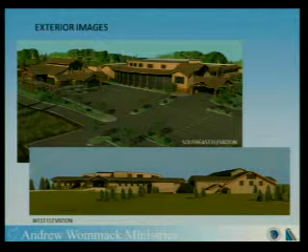This said, I will go ahead and turn it over to Kyle, and he can visit with you about the site.

Good evening, Kyle Campbell with Classic Consulting Engineers and Surveyors. I'm here to walk you through some of the site elements and some of the design elements that took place in order to get this final development plan in front of the Planning Commission this evening.

When we were first approached about this project, we were brought in early January. We were very excited about the opportunity to join this particular team and work on this project in Woodland Park. We very quickly got up to speed with the site and with a lot of the prior comments from city staff on how to move forward with trying to get this project completed.

And so what I'm going to do, if I can... okay, how do I get to the next slide? It's not responding to it. Right there. Cool. Thanks.

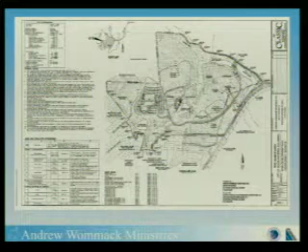As we get into the grading exhibits, it'll become evident why we chose this layout. Initially there was a concept of crossing the existing jurisdictional pond facility here, but because of the state's classification and the complications associated with that, a much better and more conducive choice from a grading standpoint was to relocate the roadway up along through here, honoring all the previously established setbacks along the southerly subdivision.

The existing pavilion is located here in relationship to the Bible College facility, with additional future housing directly to the north of that.

Moving into some of the detail sheets, the only thing I want to point out here is that a great amount of time and effort was spent working with the fire department to understand their needs for access to the site.

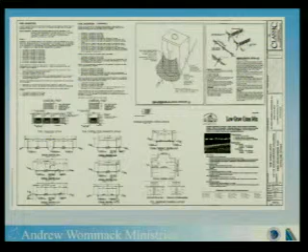On this sheet you'll see a variety of proposed private street sections, from the main entrance road to the guardhouse all the way up to the college building itself. We worked with the chief and with Vern Chaplin to get an understanding and acceptance of our proposed street sections, trying to balance the city's criteria with the fire department's criteria for access and width.

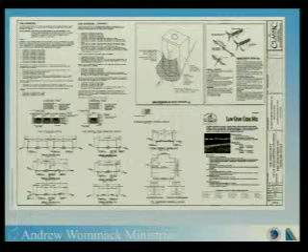There are more erosion control details here, but I won't spend any time on that.

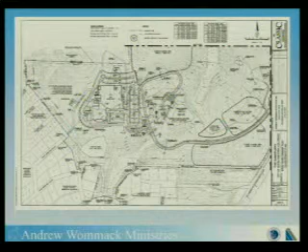Moving into the main overall plan, we get into more detail on the parking configuration around the Bible College itself. As Brett explained, there's a Phase 1 portion located at this corner, and a Phase 2 located up in this area, which has been notated on our plans. The roadway alignment, once again, crosses this tributary drainage corridor right here.

One thing I wanted to point out is the traffic circulation related to the site, as far as bringing traffic in, how it works in relationship to the drop-off area, and then exiting traffic.

This is a two-lane paved roadway coming into the site with a 12-foot wide gravel shoulder. That shoulder is primarily going to be used as a pedestrian corridor to allow hiking and pedestrian activity along through the various ultimate uses.

But during larger events, it will act as an overflow lane. That was something we worked with the fire department on as well, to get their understanding of what ingress and egress would look like during normal events and larger events, and how we could always maintain circulation in and out of the property.

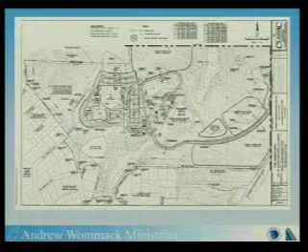As we approach the college itself, the road starts to split. While this is still a two-lane roadway, an access road splits off to provide access to the residential area to the north, and access for handicap parking for the pavilion and amphitheater in this area. Then we split off into the parking and the drop-off area for the main portion of the building.

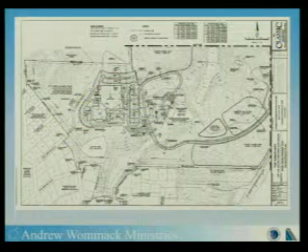We have a one-way exit lane exiting the property in this location. That's not only to assist with larger events, but even during normal events, as far as separating the traffic, allowing a free flow of traffic both in and out of the project for a very nice circulation pattern through the site.

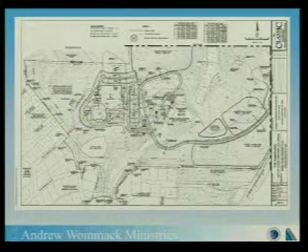As we get into this more easterly portion of the property, we've got the gatehouse. What I wanted to point out on this exhibit, and what's also reflected on the preliminary plat, is that the current property runs down portions of it through the center of Trout Creek Road, and portions of it, all of Trout Creek Road, is inside the property.

So this plan and the preliminary plat reflect the right-of-way dedication that will take place with the final plat, to basically get all of that outside of the property and get that right-of-way dedication taken care of, so the roadway is completely addressed.

We're also showing the 8-foot wide public trail contained inside that right-of-way dedication along our property. That was one of the requests of Woodland Park, and we were able to accommodate that with our last round of revisions.

This is the overall grading plan. One of our goals, and a lot of my company's experience is in hillside projects, is looking at roadway profiles and geometry to try to minimize the slopes and the impacts of roadways on the grading. One of our initial challenges was trying to maintain 2 to 4% slope grades, primarily through the entrance and the guardhouse.

As we got into key intersections, we made sure we were meeting city criteria related to public street standards. Even though these are private streets, we thought it was very important to approach it that way. We also tried to keep our street grades within a maximum of about 6 to 8%, and we were able to do that.

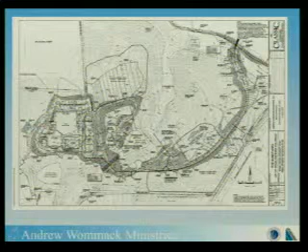I'll point out on this plan the location where we're showing our detention facility — I'll talk about that more as we get into the drainage maps. This is also the embankment crossing, where we cross the tributary drainage corridor down into the middle pond in that location.

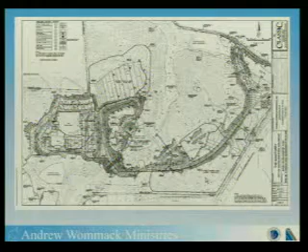Erosion control plan — I won't go into a lot of detail, or any detail, on that.

We then start to get into the utility plans. There's obviously a lot of information contained on these plans. I'm going to defer the conversation about the overall water system to a later slide in this presentation that will point out the benefits and what we've been able to do from a water system standpoint.

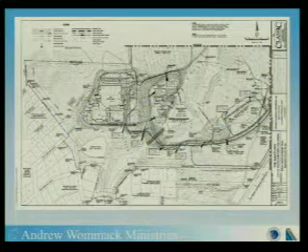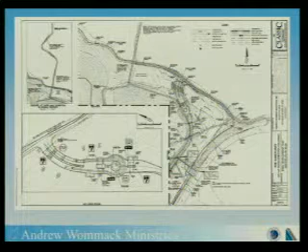I'll point out on this second utility plan that we have the main entrance and the guardhouse facility here. We were able to go back and modify that entrance, working with the fire chief and with Vern, to get the widths, dimensions, turnaround radiuses, and slopes through this main entrance corridor right, to make it an easier and safer travel path.

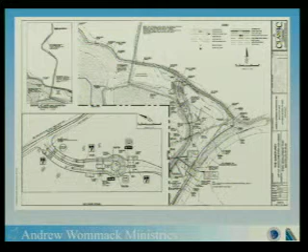Just a brief explanation of the security measures during normal operations. If you're a visitor or supposed to be on campus, you enter the site here, stop at the guardhouse, and the actual gate is located further back. So if you turn in here and think you're going somewhere else or aren't sure where you're at, you have access to this turnaround to turn around and exit the site before entering beyond the gated area.

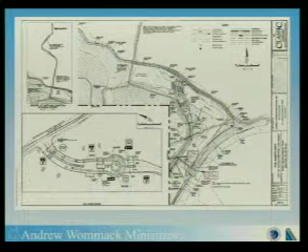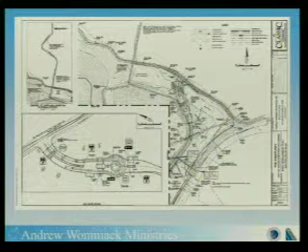We were able to design this not only for fire trucks but also for semis, for deliveries and things like that. A lot of people wind up in places they're not supposed to be at, so we've provided appropriate turning movements to make sure that's not a problem for visitors to the project.

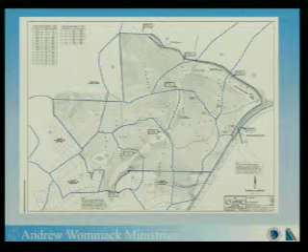Working very closely with them, they were able to modify their floodplain analysis for the entrance in order to accommodate the modifications that we made there. What you see in your packet inside their report is a FEMA-designated floodplain through here. It is a Zone A, which means it's an unstudied floodplain.

As part of their analysis, they went through and reanalyzed the hydraulic and hydrologic components of Trout Creek to study what the floodplain is actually doing through this corridor, and with our entrance, to ensure we're not making the floodplain any worse than what it already is. Through their analysis, they confirmed that with the drainage structures, the 4 pipes proposed for this crossing, we are well within the confines of the FEMA established floodplains, both horizontally and vertically. That's in their application package, and all their calculations are included in the report in front of you right now.

The rest of the drainage, dealing with an environment like this, you want to minimize your release points, especially into very natural and well-established drainage corridors, like this tributary downstream of this middle pond. So instead of proposing 2, 3, or 4 different detention ponds, which would result in multiple release points and concentrated flows, with the grading, roadway grades, and drainage system, we're able to take the Bible College, this future residential area, the admin building, and the majority of the roadway network, and get it all released into one detention and stormwater quality facility. That proved very beneficial, allowing us to release in one location down into this corridor instead of multiple locations.

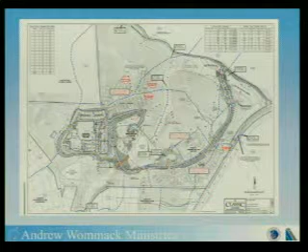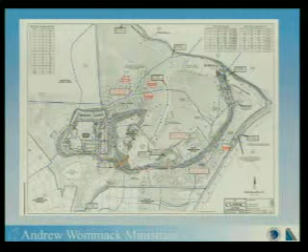It also allows for one central location from a maintenance standpoint for the ministry, so they only need to focus on accessing and providing ongoing maintenance for that facility. We used Denver urban drainage criteria, full spectrum detention, and stormwater quality volume measurements, and felt it was prudent on this site to be even more conservative and provide an additional level of security for the facility, both for storage and release, to make sure that at key points along the site we were matching historic release rates and therefore not impacting anything downstream.

The drainage was also a very big focus of ours as we got into the site.

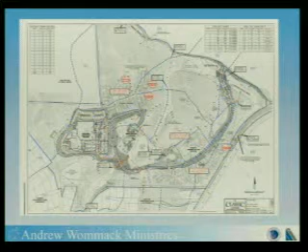The water system was a very challenging endeavor for us, I'll be perfectly honest. As far as getting into the overall modeling and system, there were a number of constraints, including having to recognize and honor the hospital located to the south of us, making sure that their pressures and flows were not being reduced to a point where it would cause any issues with servicing the hospital.

Working very closely with Jim and with Kip, we went through several iterations of the model, looking at several different pipe sizes. The biggest component of the overall water system is that with the initial phase of construction, we will be making a loop through the site and tying back into the Sturman water system located farther to the north. This effectively creates an additional southerly loop for Woodland Park that makes the connection and starts to minimize the existing dead-end system currently servicing the hospital.

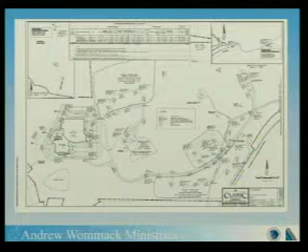With future development, as shown conceptually on our plans, as this residential area comes online down through here, we'll be extending additional loops, which will further reduce the overall dead-end length servicing the hospital. We were very pleased, working with city staff, to get to a point that everyone agreed that with the pipe sizes, meeting all fire flows and minimum pressure requirements, we were able to propose a system that everyone agreed would service this particular site.

And then the last slide I have is the preliminary plat. Once again, a lot of information on this particular sheet, sort of a recompilation of a lot of what's on the development plan. It shows the right-of-way dedication along Trout Creek Road, the street sections for the various areas through here, and all of the utility corridors proposed for the public sanitary and water system going through the property, including easements being granted, third-party easements along this edge of the property, based upon the potential of being able to service the existing residential areas along and through here.

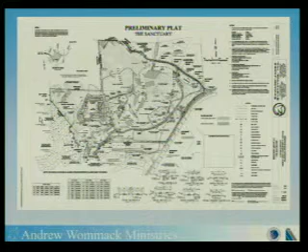So with that, that is the end of my presentation. If there's any questions, I can answer them now. Anybody have any questions at this point? No? Thank you.

We'll just minimize Kyle's presentation here, and if you would like to get out your staff report and follow along with the compliance to the code, I am going to begin on the bottom of page 2 and up to page 3.

Beginning with the purpose of a PUD, which is to provide more flexibility and latitude in design, a greater variety of principal uses, accessory and primary, and to encourage initiative and more effective allocation and creative development of parks, recreation, and open space. The staff analysis proposes that this project, being a mixed-use project, meets the purpose of a PUD with the application of greater flexibility in design, a variety of principal and accessory uses, and the preservation of significant open space.

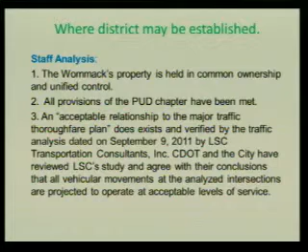Also under this section, this proposal has an acceptable relationship to the city's land use plan. Our comprehensive plan map designates the site as a mixed-use location, which is compatible with the PUD-PBD zone. We've also analyzed the capacity of the utility lines and verified that the water and wastewater analysis has the capacity to serve this project, and as you heard Mr. Campbell say, it helps with the capacity for the hospital. The applicant made contact with electric and natural gas providers, and they too have the capacity to serve.

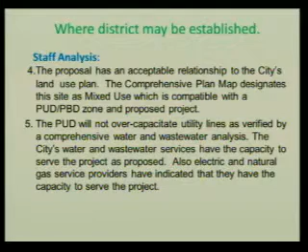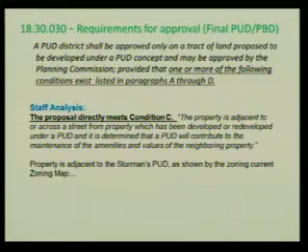Moving on to page 4 of the staff report, these are the requirements for approval of a PUD, and our code says that one of 4 conditions must be met in this section. This proposal directly meets condition C, which states that the property is adjacent or across the street from property which has been developed or redeveloped under a PUD, and it is determined that the PUD will contribute to the maintenance of the amenities and values of the neighboring property. According to our current zoning map, the subject property shown in green is across the street from the existing Sturman property that was zoned a PUD in 1995.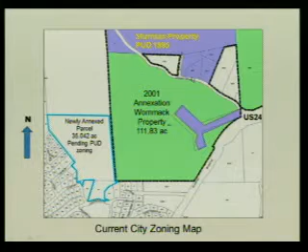This project, however, does secondarily also meet the other 3 conditions. First, condition A, by preserving several of the unique physical features, such as the floodplain, the 3 ponds, the wetlands, and forested area, with 116 acres of the area undisturbed, out of the total of 147. Condition B is also met because there are 4 bunkhouses and 1 historic cabin on the site.

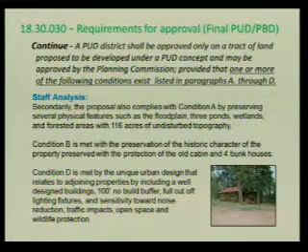The applicant is proposing to preserve or protect those areas. Condition D is also met by the unique urban design that relates to the adjoining properties, having well-designed buildings. There's a 100-foot no-build buffer adjacent to the Westwood Lakes properties. The lighting fixtures will have full cut-off shields and are very nicely designed. There is also a sensitivity toward noise reduction, traffic impacts, open space, and wildlife protection. I'll talk about those in more detail later.

Also under the requirements for approval, item E is for a planned business development, and we consider the Bible College a business development, even though it is an educational institution and a tax-exempt development for the most part. There are 3 criteria under item E, and all 3 must be met.

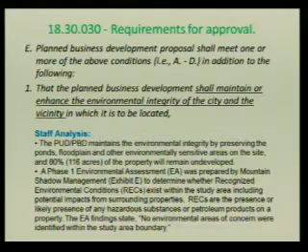The first is that it shall maintain or enhance the environmental integrity of the city and the vicinity. This proposal accomplishes that in several ways. First, the ponds, the floodplain, and other environmentally sensitive areas on the site are preserved or protected. Also, a Phase 1 environmental assessment was completed and placed in your packets, to determine whether there are any recognized environmental conditions existing on the property. It was concluded by the EA that no environmental areas of concern were identified within the study area.

So we believe item E1 was met, to maintain the environmental integrity of the site. Item E2 is to determine its compatibility with the vicinity's existing and proposed uses, and through good design as well as mitigating potential impacts, we believe this item has been met.

Specifically through the architecture that Mr. Prather showed you, it will represent a lodge-style type architecture complementary to Woodland Park's architectural themes. The buildings will use earth tone colors and materials, including moss rock, peeled logs, wood components, and stucco. The design characteristics and materials were purposely selected to help mitigate impacts on the adjoining property owners.

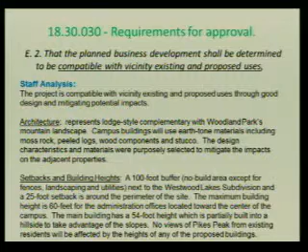The setbacks and building heights have also been carefully thought through. First is the 100-foot setback no-build area adjacent to Westwood Lake subdivision, then a 25-foot setback on the balance of the property. The maximum building height is 60 feet, a 3-story building for administrative offices, located toward the center of the site so it will not impact any views of the area. The main building, the sanctuary, is 54 feet in height, partially built into the hillside to take advantage of the slopes, and once again no views of Pikes Peak from the existing residences will be affected by these heights.

Continuing with the analysis, the exterior lighting: there has been a photometric plan as well as lighting fixture specifications submitted. They do meet the dark sky standards with full cutoff shields. The grading and landscaping plans have also been carefully thought out to help mitigate potential vehicle headlights on the west side of the building.

With respect to noise, much of the activity will take place within the contained building of the classrooms, auditorium, offices, and banquet hall. There's also a parking garage in the main building. The outdoor pavilion and amphitheater is located in a natural bowl toward the center of the property, and there is a very thick buffer of spruce trees between the pavilion and the Westwood Lakes neighborhood. The student housing is also located a significant distance away from Westwood Lakes subdivision.

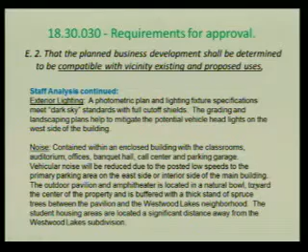Continuing with traffic analysis, which was already mentioned, LSC determined that with improvements to Trout Creek Road and the intersection to US 24, the adjacent streets will have the capacity to handle the anticipated increases in traffic projected for the build-out. The new private road is designed with an optional gravel lane to accommodate traffic increases during special events or emergency situations. The applicant is also required to prohibit access with a locked gate to the site from the Westwood Lakes roads abutting the property, with the exception of Vista Lane, which will provide for emergency service.

With respect to drainage, an on-site drainage system that Mr. Campbell spoke about is designed to carry runoff into the main detention facility, which will detain and release the runoff at or below historic rates. Low-impact development techniques are also being encouraged, and water quality measures will be incorporated to protect groundwater.

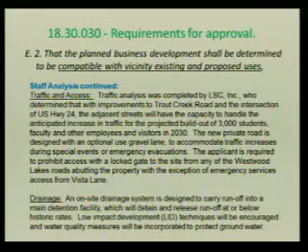With respect to water and wastewater capacity, you have a memo from former Utilities Director Jim Schultz from last August, who confirmed that the city's water and wastewater service and systems have the capacity to serve this project. The applicant is required to install all on-site water and wastewater extensions, as well as a water line or loop connection to Innovation Way near the Sturman's headquarters.

The fire protection has been thoroughly studied, and the buildings will all be constructed in accordance with the 2003 International Fire Code, fully sprinkled, etc. There will be adequate fire protection with water line looping, the number and spacing of the hydrants, and the applicant is also required to prepare a wildfire protection plan and implement that plan within a certain period of time. We'll review that condition, I believe it's condition number 11.

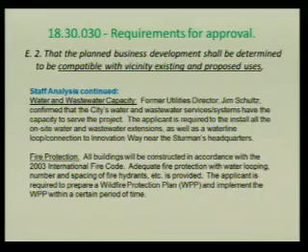I might add here that we also walked the site Monday afternoon with the local forest ranger, and he was quite pleased to hear that there was going to be a wildfire protection plan and implementation program, as well as the factors that will be implemented for wildlife protection.

The Division of Parks and Wildlife did look at this proposed project and made a few suggestions. First was to keep the fencing to a minimum, but if fencing is planned to be installed, to use wildlife-friendly fencing. The applicant is planning on implementing that recommendation.

Division of Wildlife also had a second recommendation, hoping that maybe construction could be limited to times when elk are not calving. This would be difficult to adhere to since we have such a short construction season. However, the applicant did agree that bear-proof garbage containers would be required and bird feeders would be prohibited, and they will follow that, so they do want to be good neighbors with the wildlife.

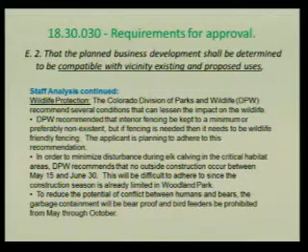Moving on to item number 3, in a PBD it shall identify economic development. You have a full report from Mr. Anderson in your packet, with just some highlights from that report. It's expected that in 2014 there could be a potential sales tax and use tax increase of over $122,000, with a projected increase of new jobs, approximately 66 jobs in the first year.

With a payroll of $2.6 million, and construction expenditures of more than $86 million for the build-out of this project. The operations and maintenance expenditures of the project could be up to $1.6 million in 2014.

Also, there is a proposal that the housing portion, the student housing, will be privatized and therefore taxed, and over an 11-year period could potentially generate $3.48 million to the school district, city, county, and other taxing entities.

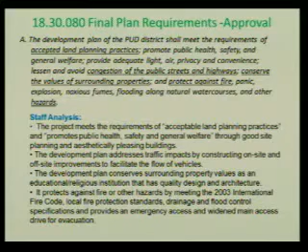The development plan addresses the traffic impact by constructing both on-site and off-site improvements to facilitate the flow of vehicles. The development conserves surrounding property values as an educational and religious institution with quality design and architecture. It also protects against fire and other hazards by meeting the 2003 International Fire Code, local fire protection standards, drainage, flood control specifications, and provides for emergency access and widening of the main access drive.

Moving on to item B in the final plan requirements for approval. This item is that a final plan is submitted and that it addresses all the information. There are 15 various aspects that need to be identified on the final plan. The applicant has complied with this by submitting complete development plans with the information, and in addition, the applicant did provide an excellent final plan narrative for each of these sections under 18.30 in section 3 of your binder.

Moving on to the next section in the PUD, which talks about the common open space requirement. The common open space, as defined in this section of the code, eliminates easements, drainage ways, and road rights of way. When you back out all of that area, the common open space for this project equals 62.36 acres, or 42% of the entire site. The requirement with the city's PUD is that at least 35% of the site be designated as common open space. For this project at 147 total acres, which falls in the 100 to 200 acre range, they're setting aside 42% of the area, so it meets the gross area requirement.

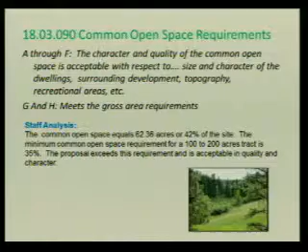The next section in the PUD deals with dimensional standards. Those are standards that relate to the lot area per dwelling unit, the maximum density permitted, and in a PUD our maximum density is 2 units per acre. Also the maximum percentage of lot coverage by buildings, the maximum height of buildings, the minimum frontage of lots, and the minimum setbacks for side and rear.

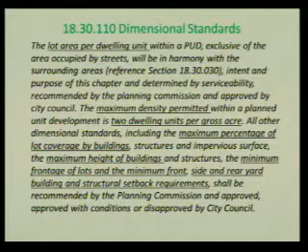These dimensional standards for this project are somewhat unique. First of all, there is no permanent housing being proposed, so it is not being subdivided, which you would typically see in a residential development for permanent housing. Rather, this is proposed to have 300 student housing units with a maximum of 500 individuals, adults, living on the campus. It's planned in harmony with the surrounding areas and the intent and purpose of this chapter, as well as serviceability. The maximum density of 300 housing units is in line with the maximum density of 2 units per acre on the 147-acre tract.

The maximum percentage of lot coverage by buildings, structures, and impervious surface is proposed to be 14.8% of the site. This is appropriate for a college campus, student housing, administration building, and accessory uses. The maximum heights, which I've already spoken to, are 60 feet maximum for the administration building, 54 for the main building, and the table also lists the other heights for student housing, etc. These are appropriate since they don't block any views of Pikes Peak, nor are they excessive.

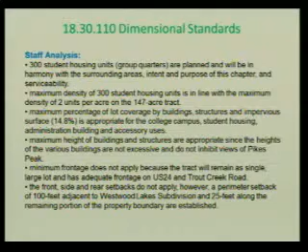With respect to parking, this must be in compliance with Chapter 18.39 for residential and non-residential uses. The proposal complies. Due to the unique mix of uses within the main building, the student housing, and the accessory uses, the applicant has proposed a customized parking formula for each building, which is acceptable to the city because Section 18.39 recognizes that our table of uses cannot always predict or cover every possible situation for parking. For example, we don't have a student housing parking formula, so the planning department is authorized to recommend parking requirements using the table of parking as a guide. We believe the applicant's proposed parking formula is adequate and agrees with the development plan.

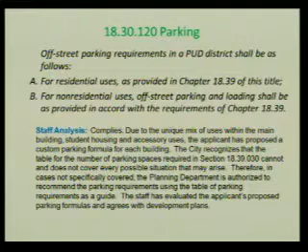Moving on to landscaping, it calls for an adequate landscaping plan, and the applicant has submitted a preliminary landscaping plan. It meets the city's design standards for parking lots and site landscaping. The plan proposes the use of hardy native trees, shrubs, and grasses, which will accent the buildings, parking lots, and roadways. The plantings have been included strategically and located to minimize and soften the development from the adjacent properties.

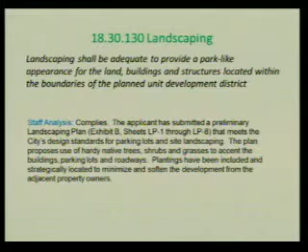Those are the standards within the PUD, Planned Unit Development, and Planned Business Development. PUDs are listed as permitted conditionally in our zoning code, so as a result we also look at the conditional use or special use criteria. There are 11 criteria in those standards in Sections 18.57 and 18.61. The reason we're looking at special use is because schools, universities, and colleges of an educational nature are considered a special use, and if proposed as part of a PUD, you simply apply the 11 criteria, which are the same for conditional use.

Starting with the first of the 11 criteria: the proposed development shall have a demonstrated direct need to be located at the proposed location. The Charis Bible College provides a unique educational and religious institution on the western edge of Woodland Park. The sanctuary and its associated uses are situated on a 147-acre tract that has ample area, serviceability, and design to complement the community's managed growth goals and objectives. There is a demonstrated economic benefit to the development and build-out, with 2,500 college students and annual conferences. The potential impacts to the environment and surrounding neighborhood with traffic, drainage, noise, lights, utilities, fire protection, and wildlife have been adequately mitigated.

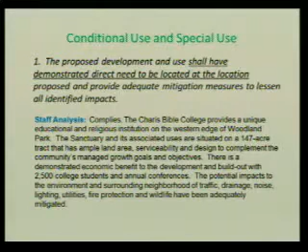Number 2 deals with that the development shall not endanger the public health and welfare. This proposal complies. The proposed development protects against fire or other hazards by meeting the 2003 International Fire Code, the local fire protection standards and drainage criteria, and a wildfire protection plan is required to be developed and implemented within a reasonable period of time.

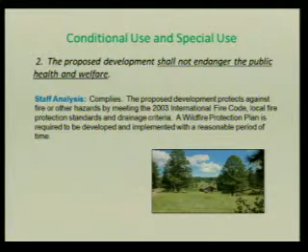Conditional use and special use criteria number 3. This is that it shall not injure the value of the vicinity properties. The development plan conserves the surrounding property values as an educational and religious institution that has quality design and architecture, and also potentially the potential development impacts have been mitigated.

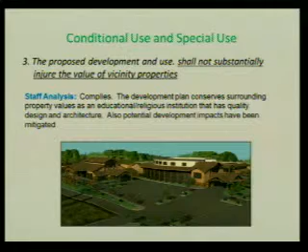That the development shall be in harmony with the area with which it's located. It's quite common for colleges, college campuses, or religious institutions to be located adjacent to residential neighborhoods, both urban and rural communities. They make great neighbors.

The student housing is planned in a clustered approach to give a village feel and is a significant distance away from the Westwood Lakes subdivision. The main building is aesthetically pleasing in its design and is built into the hillside to take advantage of the slopes. The buffer will protect trees on the southern boundary line and provides for a no-build adjacent to the Westwood Lakes subdivision. The careful placement and selection of the lighting fixtures as well as the full cutoffs also address lighting.

Number 5 is that this project shall conform to the city's plans that are in place, and it does conform to the city's 2010 comprehensive plan, beginning with 2 guiding principles, which are to sustain Woodland Park's economic diversity and vitality, and to promote opportunities for lifelong learning. It also conforms to several of the comprehensive plan overarching goals.

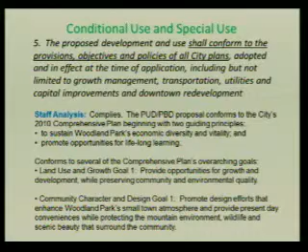that surround the community. Economic development goal number 1 is to provide enhanced job opportunities in the area, expand the availability of products, services, and amenities in the community, and facilitate the export of products, services, and experiences to import new dollars. Sustainable environment goal is protect and enhance the health and livability of Woodland Park's natural and human environments.

Water goal number 2 is to optimize the city's existing water resources to make water available to support the city's highest priority land uses and housing needs. Transportation goal number 1 is to promote a multimodal transportation network that facilitates safe and efficient movement throughout the community. This project will add an extension of the trail connection from the highway along Trout Creek Road.

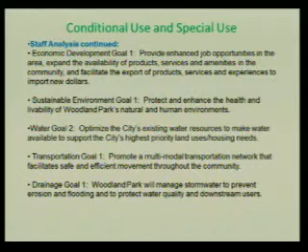Drainage goal number 1, Woodland Park will manage stormwater to prevent erosion and flooding and to protect water quality and downstream users. And a few more goals in parks, trails, and open space to develop and enhance Woodland Park's sense of place and quality of life by continuing to enhance the city parks, in this case, the trails and open space system. Education goal number 1 is Woodland Park will become an educational city, and the community heritage goal, Woodland Park community members embrace and become part of the local history and understand the importance of protecting and preserving it.

As mentioned earlier, the compliance with the comp plan map, which designates the site as mixed use, and that is compatible with the PUD-PBD proposal.

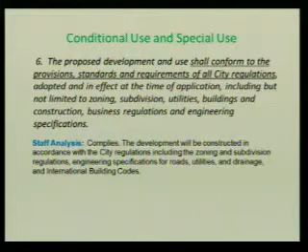Item number 6 is that the project conform to the provisions, standards, and requirements of the city regulations. This development complies, that it will be constructed in accordance with all city regulations, including zoning, subdivision regulations, engineering specifications, utilities and drainage, and the international building codes.

Number 7 is to accommodate on-site and off-site traffic generation. We believe that with the improvements proposed at the intersection of Highway 24 and Trout Creek Road, as well as the improvements on site, that it will operate at acceptable levels. And Chris can speak to that more if you would like more information on the traffic.

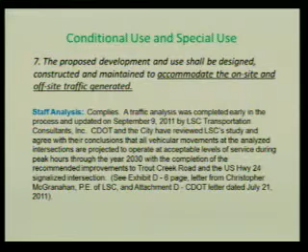With regard to an appropriate construction for topography, surface drainage, soil potentials, natural and man-made hazards, streams, and environmental significance, a drainage report and access road flood study, as well as a Phase 1 environmental assessment have all been completed.

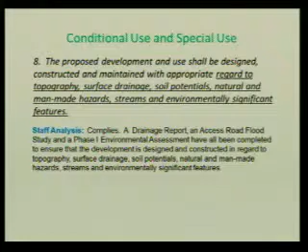This is to ensure that the development is designed and constructed with regard to the topography, surface drainage, soils potential, man-made and natural hazards, streams, and environmentally significant features. Number 9 deals with water supply, wastewater disposal, solid waste disposal, air quality, as well as surface water drainage.

It complies in that the utilities director has concluded that the city's water and wastewater systems have the capacity to serve. The applicant plans to utilize bear-proof dumpsters that will be enclosed and hidden from sight for solid waste disposal. Air quality will not be significantly impacted by the proposed use, and surface water drainage has been addressed adequately with the drainage report and access road flood study.

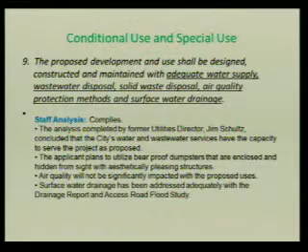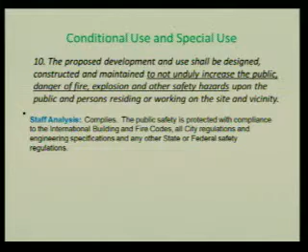Number 10 deals with the development not unduly increasing the public danger of fire, explosion, or other hazards. As mentioned earlier, this will be in compliance with the International Building Codes as well as the fire codes and all city regulations and any other state and federal safety regulations for the construction of this project.

Lastly, criterion 11 deals with architectural design schemes. The overall development will have a lodge-style complementary to Woodland Park's mountain landscape. The campus buildings will use earth tone materials, including moss rock, peeled logs, wood components, and stucco. Ample landscaping is proposed to buffer the main building and soften the parking lots, and the design characteristics and materials were purposely selected to mitigate impacts on adjacent properties.

So in summary, staff believes that the 11 criteria for both conditional and special use have been met.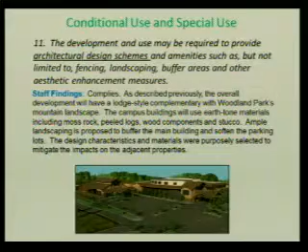Moving on to the preliminary plat. The preliminary plat for subdivision policies is to evaluate whether the land can be used safely for building purposes, and that provisions have been made for drainage, water, sewage, and public improvement. This preliminary plat or development design complies by meeting city standards for health, safety, and welfare of the subdivision's occupants. The construction will meet current building codes as well as the International Fire Code and fire flow and duration requirements. The improved ingress-egress with a 3-lane roadway will assist with those public improvements.

There's an emergency access provided on the west side of the sanctuary. The wildfire protection plan is required. The drainage plan and flood studies are complete, and provisions for water and other public improvements have already been discussed.

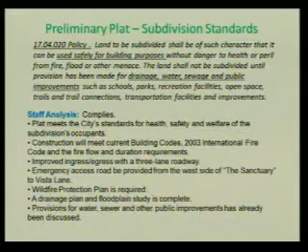The preliminary plat meets the technical information provided in Chapter 17.20. This is information that deals with the hearing process, the supplemental information, and general preliminary plat regulations. It is drawn in conformance with the applicable sections of this chapter.

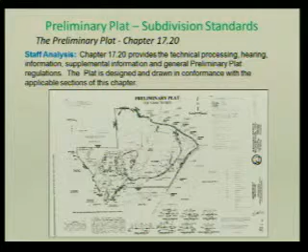As far as design standards for the preliminary plat, this deals with such things as easements, lots, blocks, streets, designs for grades, widths, and right-of-way. Very few of these standards apply to this plat due to the fact that there are private roads and no residential lots being proposed on the site, since it's going to remain as a single lot. The plat complies with the applicable design standards, such as adequate easements and grades on the private road. There's also a note here that in a PUD, the applicant can propose variations of these design standards.

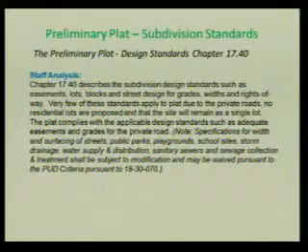The last section I'd like to quickly run through is that after public comment, once you've had all your questions answered and you begin to deliberate on this case, staff would like to recommend approval of the PUD-PBD, that it qualifies for a PUD district, and approval of the rezoning with 13 conditions on the final plan. Most of these are fairly standard in this portion of the process.

I mentioned that there was a preliminary landscape plan. The next step would be that a final landscape plan would be submitted and reviewed by staff prior to issuance of a zoning development permit. That would be, should this project be granted its PUD and final plan approval and the preliminary plat approval, then it would move to developing the construction drawings and then applying for a zoning development permit that would be issued by staff to move forward with construction.

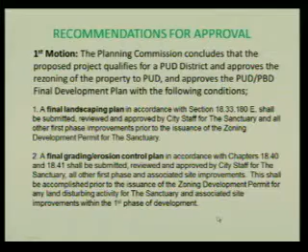So just an idea of the next steps: they would have to submit a final landscaping plan. There would also be a need for a final grading plan that meets with the city engineer's approval. A final drainage report and plan would be signed off on prior to the issuance of a zoning development permit for any land disturbing activity associated with the first phase of development. We'd also request a final photometric plan.

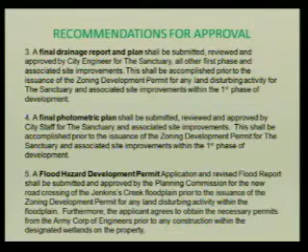Condition number 5 deals with the flood hazard development permit. You will be seeing that in conjunction with the floodplain, and that will come before you. There will also be the necessary permits from the Army Corps of Engineers for any construction within the designated wetlands on the property. Condition number 6 is that the applicant agrees to construct all the necessary road and signalization improvements to Trout Creek Road and US 24, and that an access permit will be obtained.

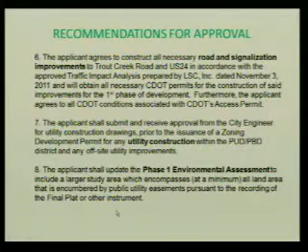Condition number 7 deals with the construction drawings for utilities prior to utility construction. Condition number 8 is an update of the Phase 1 environmental assessment. Condition number 9 is the payment of the water development fee, which is assessed at $2,000 per acre for the commercial developed sites prior to the recording of the final plat.

Number 10 deals with other development and impact fees associated with this project. They include water and wastewater taps, stormwater capital fees, transportation capital fees, utility reimbursement fees, use tax on taxable portion of construction, and any other applicable fees that may arise. Number 11 is the wildfire protection plan that will be approved by the fire district as well.

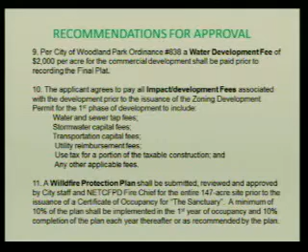Number 12 is the submittal of a final plat prior to a certificate of occupancy. And number 13 is the compliance with the Teller County requirements that were detailed in a letter from the Teller County Community Development Services dated March 20th, 2011. A summary of that is the use of Vista Lane as a reciprocal cross-access easement for emergency services only, no construction of any structures within the 100-foot no-build buffer, and that they had requested 2 specific amendments to the annexation agreement regarding the use of Vista Lane and the 100-foot buffer. So those are the 13 conditions of approval for the zoning and the final plat.

Your second motion this evening would deal with a recommendation for approval of the preliminary plat, and I needed to add, with the adjustment to the Trout Creek Road boundary line that Mr. Campbell talked about and the dedication of the road right-of-way. Just want to make sure that got in there, even though the preliminary plat has been submitted showing that is what they plan on doing. So thank you for bearing with me going through the 18-page staff report and the compliance with the code, and we would now open it up for questions.

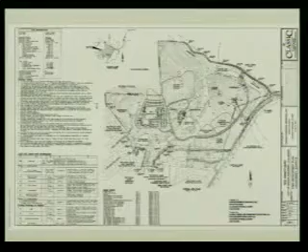Any questions? There's a lot of stuff. I have one question for staff. Has the annexation parcel been officially annexed into the city? It is. Okay, thank you.

Anybody else? I have several questions for staff. Before I ask those questions, I do want to acknowledge the excellent work of staff and the applicant. Very thorough. Almost not enough hours in the day to look at it all, but I tried. First question, Sally, and I think I'll hold my questions for the applicant until page 3.

About the middle of the page, talking about vehicular movements that are operate at acceptable levels of service during peak hours to the year 2030. What happens in 2030? We'll let the transportation... It's on a later page. I believe that's their standard future lookout, that's what CDOT requires you to do, is look at a 20-year period. So the road bed doesn't collapse in 2030, it will disappear? Okay.

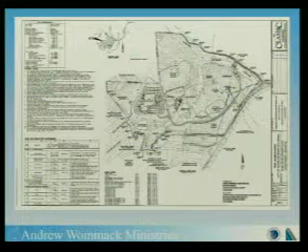Okay, the first question has to do with the student housing. Under site information, it says student housing 96,000 square feet. Down under phase 1 construction, item number 2, student housing, there'll be 12 units. 12 units divided into 96,000 is about 8,000 square feet per unit. Under their system here, they're calling for 3 stories, which would be about 2,600 square feet per slab, per story. They're calling for anywhere between 5,000 and 8,000 square feet per story. The math, as far as I'm concerned: if you do 5,000 feet times 12 units, you come up with 180,000 square feet, not 96,000. If you do about 8,000 square feet, which makes these student housings really big, you come up with 288,000 square feet total. Something's wrong on the site plan.

I wish they would keep it as small as possible for these housing units.

Item number 2 is this road that they added in here. I don't know the distance between property owners and that road, but I wish it was greater than 100 feet. It looks like they're getting pretty close to lots number 11, 12, and 13. I'd like to know the distance, because there's going to be a lot of traffic there, and we kind of want to watch it.

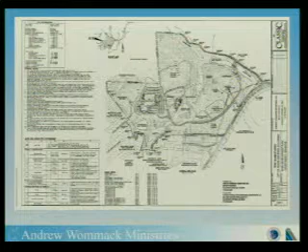Item number 4 has to do with the privatization of the housing units. Ms. Riley, when she gave her presentation, which was excellent, said there is a proposal to make the student housing private, therefore taxable. The gentleman here from the company said it was the intent of the applicant to make these private. I think it ought to be made private, and I think it ought to be written in there that these are private. Otherwise, if you build student housing and keep it in the ministry, there's no tax, no tax revenue, none off the whole property. So I'm suggesting that we make the requirement that these will be privatized and taxable on the student housing.

Item number 5. The concern would be the amount of events that the applicant has on the property. I'm anticipating maybe 2,000, 2,500, 3,000 people at 4 or 5 events. But in the prospectus it mentions an annual conference, and I'd like to know if that's going to be in excess of 5,000 or 6,000 people on the property at one time, and how long those annual conferences would last. I think that's an enormous amount of people to use those roads around that neighborhood.

The last item I have refers to the water development fee. It says it's $2,000 an acre for the commercial development. I want to confirm that on the first page, the commercial development on this property is 147 acres. 147 acres at $2,000 comes up to $294,000 for the water development fee. I would just like that confirmed and see if that's correct. Thank you much.

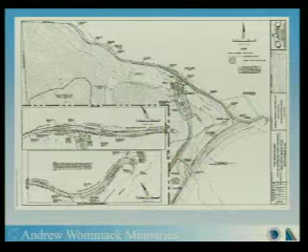Referencing the barn, the maintenance barn. Yes, the barn. Does this always seem to be the logical location? Yes, because of proximity to the west, to the facility itself. Not as a requirement, but I would strongly consider that site north of the sanctuary building and the parking lots perhaps be considered; it may be less of an impact to the existing neighborhood.

Can you come up to the podium and make your comments, otherwise it won't be on record? Sorry. Yes, once again, Brett Praker, Architectural Innovations. We can look at that site, but we did look at this site for its proximity to the west side access and also to the facilities itself, that is our reason for that.

I guess to address that, I don't know how to address it. Look at the other option at the site. That is something that can be open and we can look at. That's all I'm asking you to do is look at that.

Let's look at the grading plan a minute. Pull that up. When you look at the grading for the parking lot north of the sanctuary and all, it starts to get pretty close to their property line, the Forest Service property there.

Mr. Campbell, could you show us where the berm will be graded on the grading plan for the protection to the properties to the west? Actually, how the grading is working with this area, it's not so much the berm, but the parking lot is depressed, sitting lower, with a cut slope along this area that depresses the parking lot down. Did staff realize that was going to be the bermed area we've been talking about? Okay, thank you.